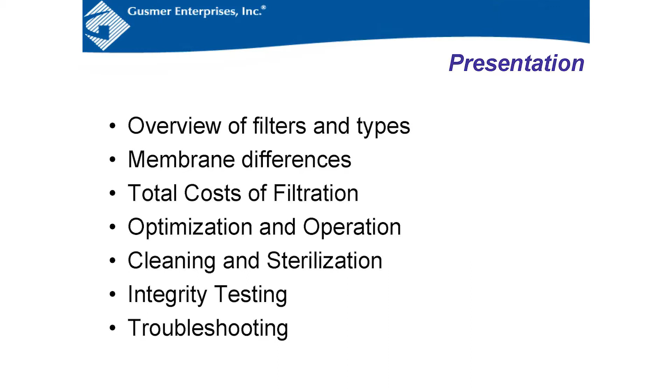After that, we look at optimization and operation, cleaning and sterilization. That's another big topic we get a lot of questions on. Folks are often asking us what's the best way to clean, what's the best way to store, and if you look at cleaning as an optimization point, there's a lot of work that can be done there with most facilities to really get the best throughput out of your filters.

I'll very briefly touch on integrity testing because again that's going to be gone into separately, and then just some final troubleshooting things.

Specifically with regards to your final bottling filtration, it's really the last step in your process that's guaranteeing your final quality of your product. It's pretty unique in that it's one step that can guarantee your quality, it guarantees your specs, and it also is pretty unique in that it's a step that has a guaranteed test that tells you if it's working or not.

There's two aspects to your cartridge filtration. There's integrity and then there's throughput. We always like to tell folks that call up with a filter issue that plugging isn't a failure. Integrity is a failure. If a filter fails integrity, then you have to worry about micro issues, and hopefully that never happens. But you do have that check.

It's rare in any industry, especially the wine industry, to have a validated QA check on a specific process step that tells you 100% if the filter's working or if it's not working, if it's integral, and if it's doing its job. So it's an important step, and thankfully it's a step that has those checks built into it.

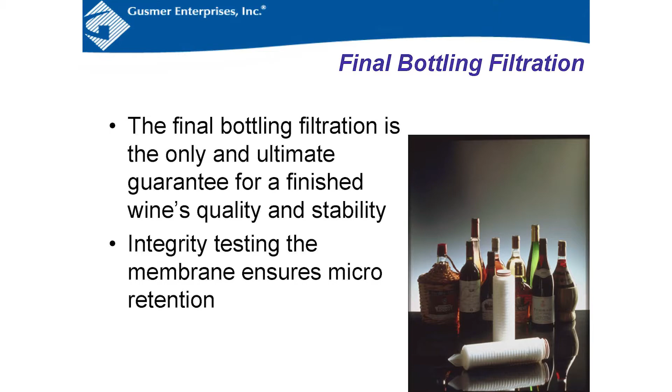So there's really two different types of cartridge filters. We've got one here, this is a pre-filter cartridge. It's a pleated pre-filter, looks a little bit more like the one on the left. We also have some other filters kicking around the room that are other clarification and wrap type pre-filters.

The one on the left, that picture of a microscope image, is a Polygard CR filter. It's a wrapped polypropylene filter, basically 500 layers of compressed polypropylene strands woven around a core. The depth is about 1 inch, so that's what we talk about when we talk about a clarification filter or a depth type filter. It has a much thicker medium, and that's used for pre-filtration, DE trap filtration, water filtration, things like that.

It really performs largely the same as other clarification products, like your sheets or your lenticulars. They may look a little bit different, but the method in which they work is pretty much the same. The other type of cartridge is unique to cartridge filters, and it's your membrane filter.

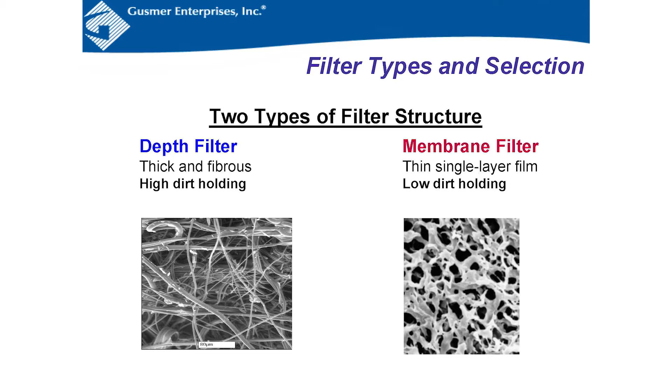A picture of that is on the right. A lot of times folks, if they haven't seen a close-up picture of a membrane, are a bit surprised. They think of a membrane as a sheet with just holes drilled into it, exactly 0.45 micron or exactly 0.65 micron, and all the removal is done at the surface. That's actually not the case with the membrane filter.

Membrane filter has a matrix that's more like a sponge. So much of the removal of a membrane filter is actually not done at the surface, it's done in the depth. So even though it does have that depth, it's absolute rated, because it's been validated not just in the wine industry, but in many other industries to give you that guaranteed removal at its pore size.

That's really the biggest difference between pre-clarification depth type filters and your membrane filter. We call membrane filters absolute because they're guaranteed to get the removal at their pore size, and also because they are integrity testable, so you can double check to make sure they're doing their job.

Whereas a depth filter, you can have unloading. So if you hit a depth filter with water hammer, pressure shock, if you run it way past its maximum differential pressure, you can get particles to migrate downstream. That will not happen with a membrane filter. If the membrane filter is integral, no particles larger than its pore size will pass downstream.

The other big thing to note with depth filters is, you guys have probably heard the term nominal versus absolute here in industry. Depth filters, we'd never call them absolute. Here at Gusmer or Millipore, we don't call them absolute. Not only are they not integrity testable, but there's a range to their typical removal.

So if you were to take 10 or 15 different clarification cartridges on the market from different vendors and line them all up, even if they were all a 1 micron filter, some may have a 50% removal at 1 micron, some may have a 75% removal, some may have a 95% removal. There's no definition or rules around what you can call a filter. As long as it removes 1 particle at its pore size, you can call it that.

At Millipore and Gusmer, we require our filters to have a minimum of 96% removal at its pore size. So if you were to get a Polygard CR clarification filter from Millipore, it's going to remove at least 96% of particles at its pore size. Many of them, like the BeviGuard pre-filter, will have 99.9% removal. So that is something you have to be aware of.

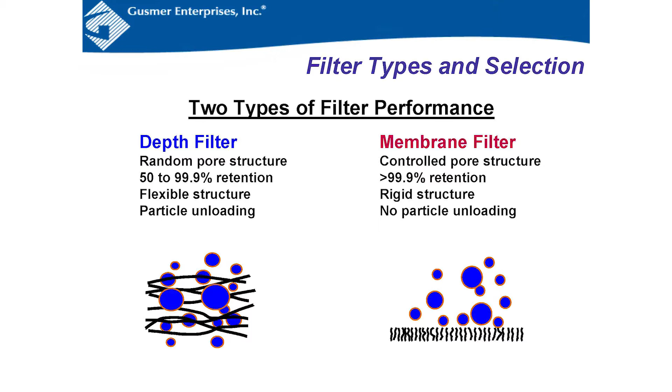We often get calls from customers. They are using another 1.0 micron filter, maybe from another industry. Water filters are notoriously low on retention if you just go to a water treatment company that also sells cartridges. And they'll swap it out with our 1 micron, and they'll think there's a problem because now the filter is plugging up much quicker. And that's because the filter's actually removing 100% of particles at 1 micron.

So you can't always look at clarification and pre-filters as an apples-to-apples comparison without also looking at the retention. You'll often want to ask the manufacturer, what is the retention of this pre-filter?

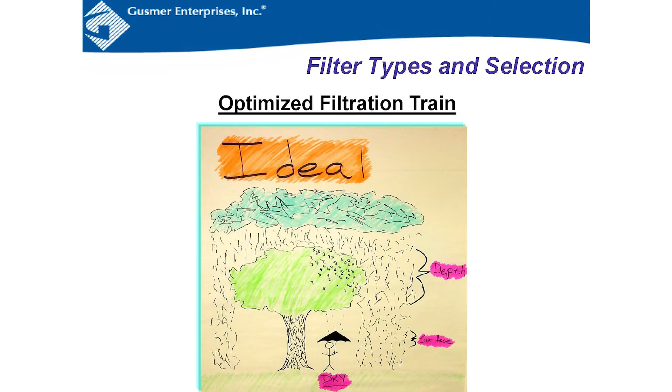The other big difference, of course, between depth filters, pre-filters, and your membrane filters is holding capacity. So in this picture, your pre-filters are like the tree and your membranes are like the umbrella. Ideally, you want the bulk of your filtration to be done by your lower grade, less expensive pre and depth clarification filters. As I said, your typical wrapped clarification cartridge is going to be about 1 inch thick.

Your typical membrane is only 400 microns thick. It's about the thickness of a sheet of paper. So while that doesn't seem like a lot, if you can imagine a microbe at half a micron or 0.6 micron, it's actually got to travel through 800 times its depth to get through that matrix. And that's how you do get that removal - not just at the surface, but also through the depth.

This is important when it comes to minimizing your costs of filtration. Ideally, we tell customers you should be using 2 pre-filters for every 1 final filter. A final filter is going to cost $300 to $400. A pre-filter is going to cost $150 to $200.

A clarification cartridge is going to cost $50 to $80. So you want to push the bulk of that filtration as far upstream as possible, using the cheaper filters for the bulk of the removal—that's what they're suited for. They have higher holding capacity, so you want to use that capacity and use the less expensive filter.

Ideally, the membrane is really just there to catch the final microbes—you don't want it doing any real heavy particulate filtration. Membrane has low holding capacity, absolute removal, it's integrity tested, and it's more expensive, so you don't want it doing the bulk of your process. You want to be using at least 2 pre-filters to every 1 final filter.

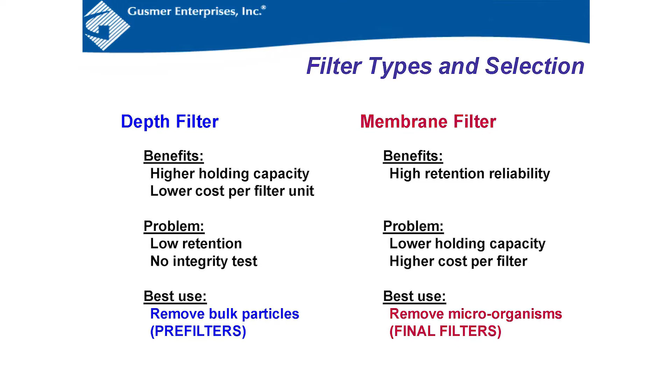If you do have a situation where you're loading up a lot of pre-filters, a plugged pre-filter will shut down your bottling line just the same as a plugged final filter. So if you're plugging pre-filters too often, you may want to add a 3rd step, either a clarification cartridge or a lenticular, something like that. It's important to manage that entire process and use the right filter for the job.

Now, unlike pre-filters and clarification filters, membranes have very defined pore sizes. Ideally, a membrane—in every case, if you're using a quality cartridge—is going to remove 100% of particles above its pore size.

There are now in industry some membranes that are non-retentive. If you see that, you have to be careful—it may not be retentive at its pore size. We don't sell anything like that, and most major filter vendors wouldn't either. So if you get a 0.45 micron filter, it's absolute—it's guaranteed to remove everything 0.45 micron and higher.

So these are your common membrane cutoffs. Unlike a clarification filter, where you can get them in pretty much any pore size—and those pore sizes are flexible because of their nominalness—membranes are really only available in certain pore sizes to industry. Other industries use 0.1, 0.2 micron, which we really don't get into with wineries.

There are a few wineries that filter down to a 0.2 micron. Most of the market here in the US, Latin America, Australia, South Africa goes down to 0.45 micron. That's 95% of the membranes we sell at Gusmer, and then we sell a handful of 0.65 and 1.0 microns, typically to French winemakers. French winemakers like using a lot of 0.65 and 1.0 micron filters because that's what most people in France do. Most Italians, Spanish, Australians, Latin Americans filter just the same as the US—down to 0.45. Most wineries don't membrane filter in France, and those that do typically only go down to a 1.0 or a 0.65.

So in our industry, 0.45 micron is considered sterilizing grade. If you read general filtration papers, a textbook, or talk to anybody from another industry—pharmaceutical, bottled water, sports drinks, Gatorade—they all filter down to 0.2 micron. So if you call a general purpose filter company and say you want a sterilizing grade filter, they're going to ship you a 0.2. It's pretty unique in wine and beer that we call a sterilizing grade filter 0.45, because a 0.45 for our industry removes all microbes of concern.

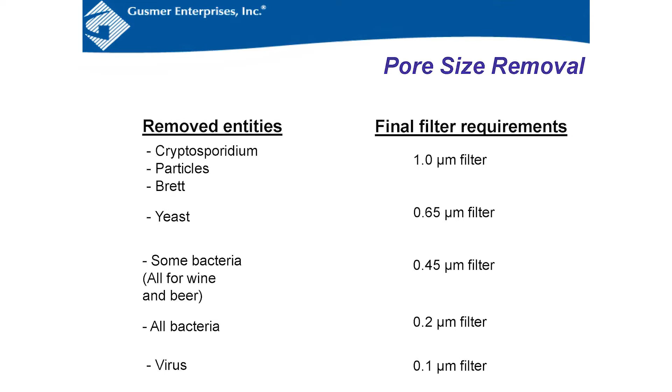For me personally, I've always used a 0.45 micron—that's what I recommend. I've seen a lot of studies over the years, and I've never seen a winemaker reliably tell the difference between a wine filtered at 0.65 versus 0.45. Maybe somebody here can, but I've never seen a study with statistical relevance showing that. So if you can't tell the difference, why introduce that additional risk of bacteria contamination? I would use a 0.45 if it's me. We sell very, very few of the tens of thousands of filters we sell at 0.65 or 1.0 micron, but that is an option out there if that's something you wanted to look at.

So here's a couple of shots of Millipore's manufacturing. One of the unique things about Millipore is that they're primarily a biotech company. They're the largest filter supplier to pharmaceutical companies, and then they found that their filters, their PVDF membrane, also works really well for wine and beer. So they don't really sell to other food industries. It's basically wine, beer, and then a smaller amount to bottled water.

But the cool thing is that their filters for the beverage market are made to the same criteria, the same lines, the same specifications as their pharmaceutical filters. And this is in Jaffrey, New Hampshire, so I know there's a few Millipore customers in here. Prior to this year, pre-filters were made in Jaffrey, New Hampshire, and final filters were made in France. As of this year, all Millipore filters for wine are made in New Hampshire, so they're sourced right here on these lines. You can see it's a pharmaceutical grade clean room, a lot of robotic technology. It's a pretty impressive manufacturing site.

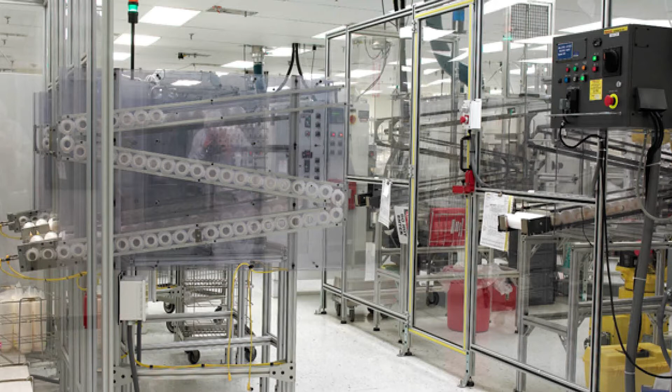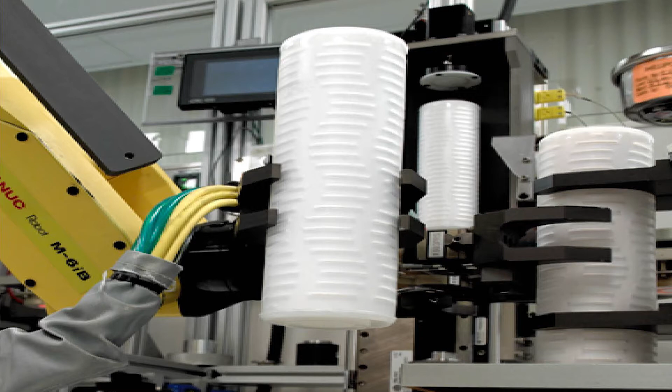As a filter person, we won't go too much into the manufacturing and how they're built because it really has no practical implication, but one of the things as a filter person I don't like is when people say a stick is a stick, or a membrane's a membrane. There is actually a lot that goes into manufacturing membranes. There's a lot of differences between the different membranes, and there are quite a few things that can impact its performance and the process that happen in manufacturing.

One small one that comes up quite often is that picture there, where the pleat pack and the end cap meet together. You have a flexible pleat pack, that's your actual membrane, and then it's bonded into this hard plastic at the end cap. If you were to survey all filter failures in the wine industry, so when you actually fail integrity due to a real in-process situation, 80% of them come down to that bond. So Millipore recently adapted a new end cap that they patented that allows for double the potting of that pleat pack into the end cap, and we don't really see those failures anymore with Millipore filters.

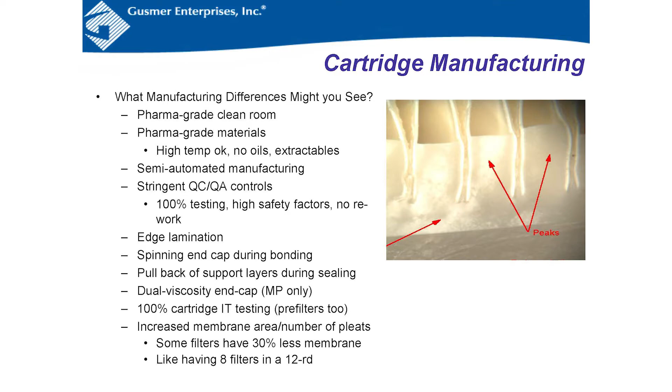So there are differences in manufacturing. The other big one is membrane area. A lot of times folks will get a data sheet, and I'm guilty of this too - I get a data sheet, half the time I throw it away. It's marketing fluff, you don't want to read that. But on the back page, skip the first 3 pages, on the back page you have your specifications. Some of those numbers can be really telling when it comes to a filter, in particular membrane area.

If you're loading 30 sheets versus 40 sheets into a press filter, or a plate and frame filter, there's a difference in surface area there. But if you're just putting the same looking cartridges into housing, you may not realize that there's 20 or 30% less membrane in that filter, and that's having a big impact on your total throughput and your process costs. So definitely look at the filter, look at the manufacturing, look at its stress tolerance, its pressure ratings, its membrane area. They are different.

The other big difference outside of the cartridges themselves is the membranes. So 10 years ago, this was a lot harder slide to present. There were tons of different membrane options on the market - cellulose acetate, nylon, polypropylene, PVDF. There were all these different membrane formats out there. Now the industry's really boiled down into 2 membranes. We continue to sell PVDF membrane.

It's what Millipore has always sold with. It's basically the filter that built the company. We find it works best for the wine industry. Even though they do have PES filters they sell to other markets, everybody else has pretty much gone with a PES membrane. The 2 main differences between the membranes is that PVDF is symmetric and PES is asymmetric. Also, the membranes have different surface treatments. So a membrane is basically just a big piece of plastic.

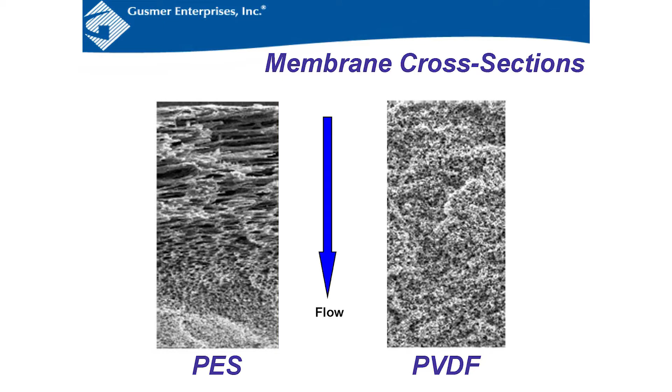This can have a couple implications, mainly in integrity testing. Since your integrity test specifications, as you'll see in the next presentation, are built around your final pore size, this has a much smaller area of that pore size. So the bubble point's lower and the diffusion's a lot higher. So the two filters do integrity test slightly differently. Fundamentally, the procedure's the same, but you do have to be aware that the specifications are a little bit different.

The other issue is with flavorings. We just did this seminar up in Napa and Sonoma. Nobody up there uses any kind of flavorings, but if you were doing any kind of blackberry merlots, wine coolers, a lot of products we see out on the East Coast, then flavorings can be very difficult to rinse away with asymmetric membranes. That's something you have to be cognizant of if you are doing flavored products. It's much trickier to rinse them out of an asymmetric membrane because of the way they coat and get in there and then change the surface tension.

So would concentrate work the same way? Is it a wine concentrate? A wine concentrate really shouldn't change the surface tension, it's more the flavorings that have different oils and things in them. What if it were a concentration of something like that, a lower concentration? No, typically I wouldn't expect more artificial stuff. A pure fruit concentrate, which we deal with a lot now in the brewing industry, typically you wouldn't see an issue with cleaning. It would clean largely the same. It's tougher, concentrates are usually tougher to filter just because of viscosity and the concentration of materials in there, but with regards to cleaning, no, it shouldn't have an impact on your integrity test.

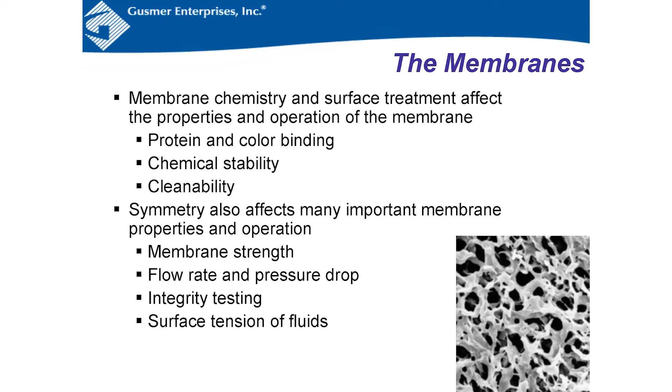Sometimes I put this slide up here, and it's not meant to scare folks into thinking that any membrane's removing a lot of stuff. Really, no membrane is going to remove any noticeable protein or color from your wine product. I've seen 96 round 40-inch housings, these massive housings, and they're not going to change your product at all either. So it's not so much that you're removing things from your wine with higher protein binding, it's that those proteins are then bound to the membrane, which causes a quicker loss of filter capacity, fewer cleaning cycles, and then lower throughputs. So this really has more to do with cleanability than anything that would change your product.

The other issue is with strength and robustness of the membrane. As you can imagine, with more void volume there's just less plastic there. So when you get to more open pore sizes like 0.65 or 1.0 micron, PES filters typically have a much lower pressure tolerance, and it's hard to find one made out of a 1.0 micron. So if you wanted to use a 1.0 micron, you'd probably have to use a PVDF filter just because of that greater stress tolerance at the more open pore sizes as you start to open up those pores.

So really that's why we recommend PVDF, because all of those things generally lead to higher throughputs, lower numbers of issues, and then gets you a lower total cost of filtration.

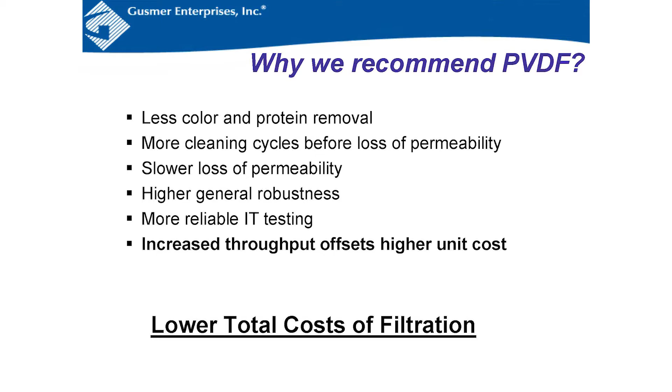You've heard me say throughput several times now. That's really the key metric. I hope everybody knows their throughput - how many gallons per change out, how many gallons per filter you're getting. You really can't look at your filter process, select a filter, or know what you're paying for the filter without looking at that number. If you have two filters, one's $400 and gets 100,000 gallons through it, one's $200 and only gets 20,000 gallons through it, that $200 filter is actually costing you $1,000. You can't look at filter costs without knowing how many gallons are getting through it. The two have to go hand in hand.

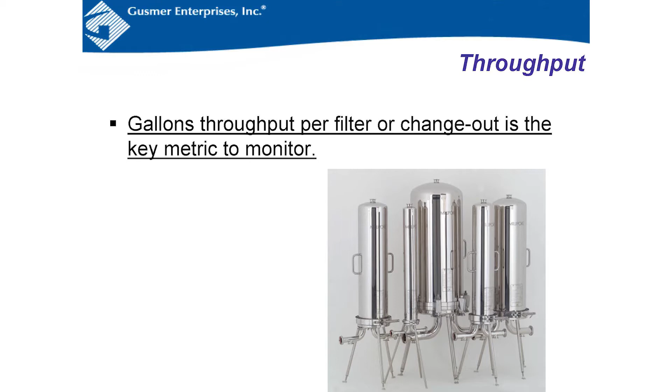Once you know your throughput, you work on optimizing it - cleaning procedures, flow rates, all the other things you can do to get more throughput out of your filter. We've helped some customers increase their throughput by a factor of 10x over a few years. So particularly in this area where folks are spending quite a bit of money on filters, if you're spending $50,000 a year on filters and now you can get 10 times the flow rate out of it, that has a huge impact to your budget. There's a lot more potential, particularly in this area, to optimize your filtration.

So when we talk about the total cost of filtration, there's really three different aspects we're looking at. Again, you have your throughput - you want to get as much throughput through your filters as possible, and that directly relates to your filter cost, and then you have your total cost of filtration.

I know in this area, one of the big rules of thumb for bottling line downtime is $6 a minute. Every minute your bottling line is down, you have a crew standing there, soap going on the conveyor, compressors running, pumps running. It's generally an industry accepted value of about $6 a minute cost. So if you have filters on multiple lines plugging up a couple times extra each week, and it takes 2 hours to turn around a filter, there's a huge cost, not just to your bottling attainments, but to having your folks and all your equipment running.

Also, every time you plug up an 8-round or a 12-round housing, that's quite a bit of wine loss. Look at cleaning - every time you have to clean the filters, 30, 40 gallons a minute, times 2 hours of water going down the drain. In this area, water's not as big of an issue. You go up to Napa, water's huge. If they're sending an extra few thousand gallons of water down the drain, that can be a big impact. It's important everywhere in California, but certain areas are particularly hit hard by water restrictions on wineries.

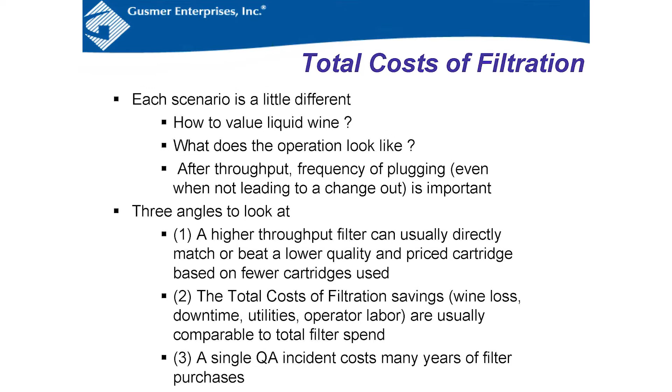And then obviously a single QA incident - you should never see a legitimate integrity failure on a filter. One of the things that bothers us is when we run into a customer that's kind of lackadaisical about integrity failures, like 'yeah, I fail integrity every few months, or yeah, we have an issue.' You should never see that with our filters, and you should never see that with any filter. If you're failing integrity, that's a major issue - that means your product is at risk on that batch. So if you have an integrity failure, let us know, let your supplier know, you want to troubleshoot that. I can say 90% of the integrity failures we deal with are due to shipping. UPS and FedEx by far damage the most filters, or cause the most filtration issues in industry. So always be cognizant of shipping damage and do a careful inspection on the filters.

But if you do get a real filter failure that results in a QA incident, there goes your filter cost savings for the next 50 years. There's nothing more expensive than a single QA incident. So if you do have a filter that's giving you repeat issues, you may want to look at changing it, or work with the vendor to fix that, because that's a cost that really shouldn't happen.

So people hate spending money on filters. Winemakers have no problem writing a $100,000 check for bacteria, yeast, barrels, oak, shiny new tasting rooms. Nothing gets a visceral reaction from people more than buying a filter. Nobody wants to spend money on a filter for whatever reason.

But when you really break it down, if you're getting 100,000 gallons through a 30-inch filter, the cost of filtration is $0.004 per gallon, which is 0.08 of a cent per bottle, or $0.0008 per bottle. That's lower than your cost of SO2. That's lower than your cost of the label. That's the lowest process cost in industry.

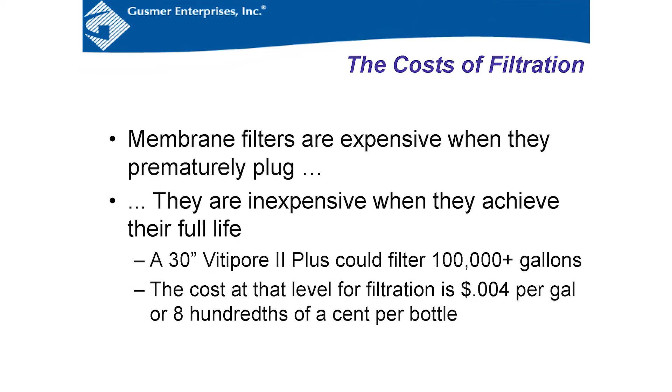One thing that a lot of facilities do, which really doesn't make sense for the wine industry, but it's what the industry does, is everybody wants the same size final filter and pre-filter. If you're running a good process and your pre-filter is plugging twice as often as your final filter, that doesn't really make sense. You should have more filtration capacity there. It doesn't matter if a pre-filter plugs or a final filter plugs—either way, your line's down and you have to clean or change out the filters. So if your pre-filter's plugging twice as often, you should use a bigger pre-filter housing.

A few folks are starting to go down that route, but most people still size the final filter and then want the same size housing on both. There are benefits to that—you've got the same size gaskets, the same spare parts—but really, pre-filters should be sized bigger than the final filter. That's what most industries do, but not so much in the wine industry.

Water filtration is usually sized a bit higher just because there are higher flow rates with water. And if you're doing any kind of specialty cartridge processes—DE trap filters catching fines, or clarification for tartrates, special processes like that—come to us and let us know, and we'll size that out for you, because those are a little less cookie-cutter.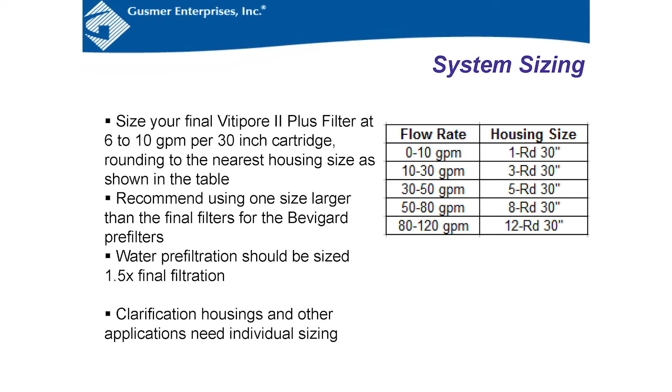One important thing with system sizing: most often when customers come to us looking for the recommended size for their line, because these are tied to the filler, they give us the average bottles per minute of a filler. They'll say, I'm running 100 bottles a minute, I'm running 200 bottles a minute. That's your average filler output—that's not your maximum flow rate through the filters. So if you're sizing based on average filler output, you have to add 30% to account for your maximum flow rate, then size your filters based on that number.

One thing that I'm a huge fan of, particularly in this area, I think there's a lot of customers saving a lot of money and really helping their operation out, is dual filtration skids. This is something that's really starting to finally catch on, and I think anybody running an appreciable, larger size bottling operation that doesn't have dual filtration skids is probably leaving a lot of money on the table.

What this entails is you have identical pre and final filters, so the same process you're running, but you have two sets of the same filters side by side. You've got one inlet, one outlet, but the filters are capable of being cleaned independently. So as you're running on one filter set and it starts to plug, you can get your second filter set cleaned and sterilized and then switch over to it, so that way you never shut down bottling.

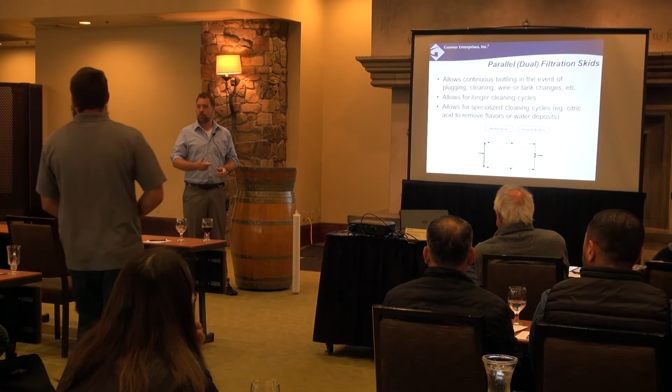You can also bring down your filters at their optimal cleaning point. A membrane filter is typically fully plugged at 40 psi differential. Differential pressure is your inlet minus your outlet. Most people are going to start to lose flow at around 32 psi. The optimal cleaning point is 28 psid. You don't want to run your filters until they're 100% plugged and then take them down to clean - you're not going to get as good of a cleaning out of it. Ideally, you want to take those filters down a little bit early.

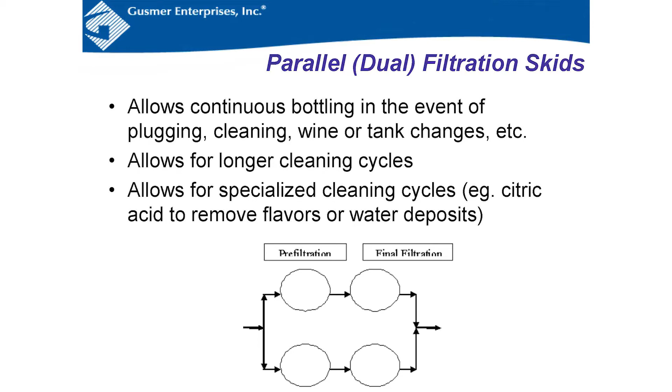This allows you to do that a little more flexibly. It also allows you to get every last drop out of your filters, every bit of capacity, because you're not shutting down the bottling run.

Right now, if you're running just a pre and a final filter, and those filters have just plugged, and you still have a large batch to go through, or another day's run, the tendency is going to be to throw away those filters rather than clean them. With this process, as long as you can clean that second set before the other ones plug up, you can keep running.

A lot of large wineries now with this system have a spec to throw away filters if they plug within 2 hours. If it's still got an 8-hour run on it, that may not be acceptable for some facilities, but if you have dual filtration skids, you can just keep bouncing back and forth between them, never shutting down bottling, getting more cleaning cycles in, and using every last bit of capacity on those filters. I've seen facilities go to this and in some cases increase their throughput through their filters by 40, 60, or even more percent. This can have a huge impact.

If you think about the costs, a lot of times folks think housing - a big chunk of stainless - is expensive. The average cost of a 3-round housing is $2,500 bucks. So if you're running 3-round housings, two housings is $5,000, plus some piping and valves, $6,000. If you can extend the life of your filters by 50% or more, never shut down bottling, and have that greater flexibility, you always have a backup set.

One of the worst things when you're running a filtration is at the end of the run, the VA film on top and the solids that have settled to the bottom start to come together, and then you plug up your filters with 50 gallons left, or 100 gallons left in the tank. What do you do with that wine? Do you do a 2-hour cleaning to try to get that last little bit of wine out? Do you just send it to reclaim? Do you send it to top off another tank that's now going to kill that tank's filterability? With this system, you don't run into those situations where you've got to come down and extend out the shift. So it gives you a lot more flexibility as well.

Once you've got your filters up and running, they're actually pretty simple. You want to track your throughput, you want to track your differential pressure. Your differential pressure is your inlet minus your outlet. That tells you how plugged your filter is. It's a direct ratio. Your filter's fully plugged at 40. That means if your PSID is 20, the filter's half plugged. Half the capacity for that run is used up.

The other thing you want to watch out for when you're operating is the formation of air and gas bubbles. So you always want to vent your housings. This is something, particularly in this area, we do see a lot of, and we're starting to see more and more of it as customers are starting to spritz a lot of their wines. So adding 30 ppm, 60 ppm of CO2 to like a white wine, that's adding a gas that can then come out of solution, particularly if you're processing outside or it's hotter out.

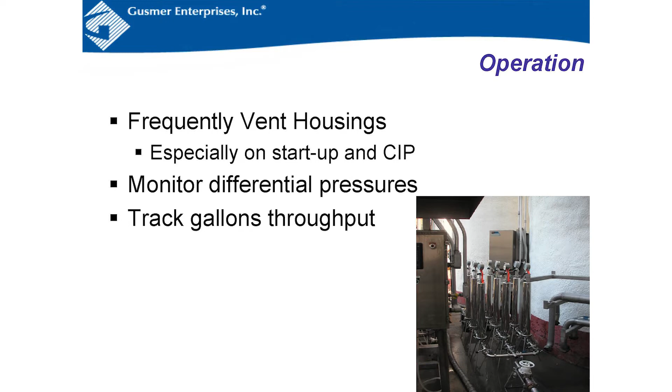Usually, you can see the housing over there, it's a tall dome. That's usually the high point in your process. So any CO2, N2, oxygen that comes out of solution, it's usually going to settle in the top of that dome, and then that starts to create an air bubble. The membranes, if they're wetted and you have an air bubble up there, as it starts to overlap, it won't allow flow through the filter.

So we've gotten filters back from customers where the top part of the filter is pure white, looks like it just came out of the bag, and then you start to see this gradient and the bottom is red, like it's processed wine. And we know instantly that there's an issue in that facility with air bubbles, or they're running a carbonated product and it's overlapping, and you're essentially not using part of your filter in that instance.

So if you don't have a sight glass, that housing has a sight glass on it. If you don't have one, I recommend getting one. And then the other option is, if you're walking through your facility, look for the condensate line. You're processing cold product, there's going to be a condensate line that forms on that housing wherever the fill level is. So that's sometimes a quick way to go through, but you'll want to always make sure your filters are vented.

Not just during operation either. You want to make sure they're vented during CIP. Usually there's a higher DO and there's more entrained air in your CIP process, especially when you're switching back between cold and hot water. If you get an air bubble that forms during CIP, you won't get the contact in the top of that dome. I've seen a lot of housings where you flip the dome, you look in there, everything's nice, shiny stainless up until the end of the dome, and then you have a biofilm, you have growth in there. And it's on the upstream side of the filters, so the filter should still filter everything out, but it's certainly not good to have growth inside your dome. So it's important to also vent during CIP processes as well.

One of the trickiest things is when we get a call and somebody says my filter failed. And then we ask, well, what happened? And they tell us it plugged. Plugging is not a failure. Plugging is the filter doing its job. If a filter plugged, that means it did its job, and now we have to look at why it plugged.

Did something change with the wine? Does it have a poor filterability? Is a screen broken on a pressure leaf? What happened that caused that plugging, if that plugging was out of normal for the facility? If normally they get 100,000 gallons through the filter and now they've only gotten 30,000 gallons through the filter. Is there a new additive? Was there a process change?

What's going on? But the plugging in itself is not a failure. A failure is integrity. Your end of life should be plugging based, so every filter eventually should plug. And particles will plug differently. So if you have an issue with DE, for instance, that has very little impact on your filter capacity. DE really doesn't plug your filters all that much because it's a hard particle. It leaves flow channels, it builds up on the surface of the membrane. It really doesn't do much, and it's very easy to clean off.

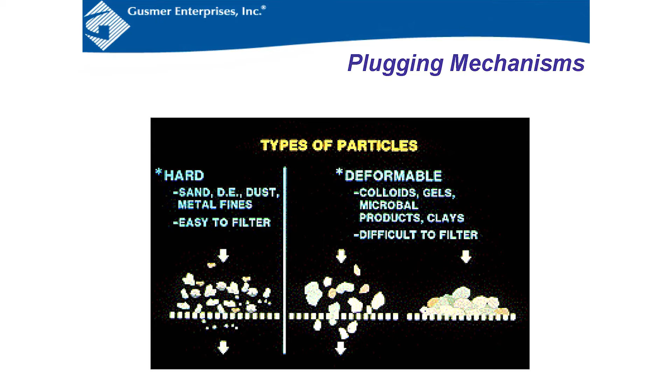The hardest thing with regards to plugging are your deformable materials, colloids. Usually microbes aren't present in too high a concentration to cause an issue. Bentonite, there's nothing worse for filters, not just cartridges, but every filter, than bentonite. When I worked at Millipore, even on pharmaceutical projects, if we wanted to plug a filter for a study, we'd get wine-grade bentonite. Companies that make filters for other industries still buy wine-grade bentonite in order to plug their filters. Nothing will plug filters better than bentonite. So you never want to not have a well-racked wine or do anything where bentonite can get into your filters.

Those materials are really what causes a loss of your filter capacity during a run. And that's because of the way they blind off on the surface of the membrane. I think we touched on most of this, but one thing in here that I think surprises a lot of customers is the impact that flow rate can have.

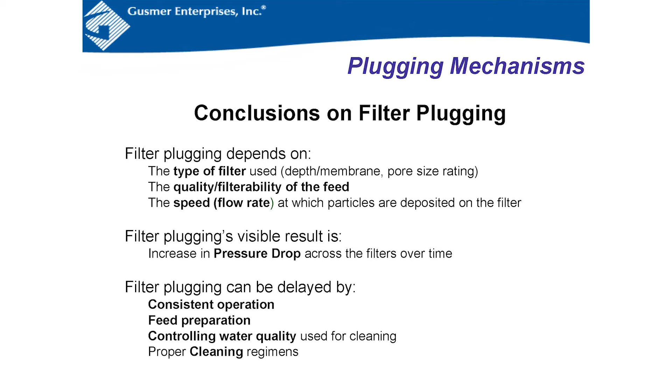If I were to take two identical tanks of wine through two identical filters, 100% same process, except for flow rate. So 1,000 gallons of wine filtered at 20 gallons a minute versus 1,000 gallons of wine filtered at 40 gallons a minute. At the end of the run, the one that was filtered at 20 gallons a minute is going to have a much lower differential pressure. It's going to be much less plugged. Even though the particles have stayed the same, even though the gallon size has stayed the same, running at that higher flow rate blinds off the membrane more effectively.

We call it face velocity in the wine industry. You want to have the lowest possible face velocity, and that'll help during the run extend your filters more. That's not really going to have a long-term impact of the filters. You're not going to degrade the filtration capacity over many runs much differently, but during the run, your differential pressure is going to increase much quicker the faster you run.

So we always tell customers to run at the slowest consistent flow rate as possible. And sometimes that's tricky, with filler operators that don't realize there's more than just off and high speed on their filler. You can use that filler surge tank or that filler bowl as a good surge tank. You can slow down your flow. You can tie your filler to your pump sometimes and change the speed on this. So you want to always run at the slowest consistent flow rate as possible.

And then the biggest thing that's going to have an impact in many cases on your filters is the filter cleaning. So really there's two purposes of cleaning. The first one is to eliminate any flavor or color carryover, and the second one is to extend the life of your filters. If you didn't clean your filters, they would plug up and lose their capacity much quicker than when you clean them. As your differential pressure goes up, you shut down, you clean them, your differential pressure goes down.

No filter can be 100% cleaned. They're always going to plug up. Eventually they're going to lose their capacity, they're going to plug up, and you're going to have to change the filters out, even in a perfect process. There's two main reasons for that. Two things that really cause your long-term loss of filter capacity. That's your bound proteins at high temperature. So going back to the membrane characteristics, anything that's bound on the membrane when you get to 135 degrees or higher on your cleaning is going to be permanently lodged onto the membrane, and that's going to cause a loss of capacity.

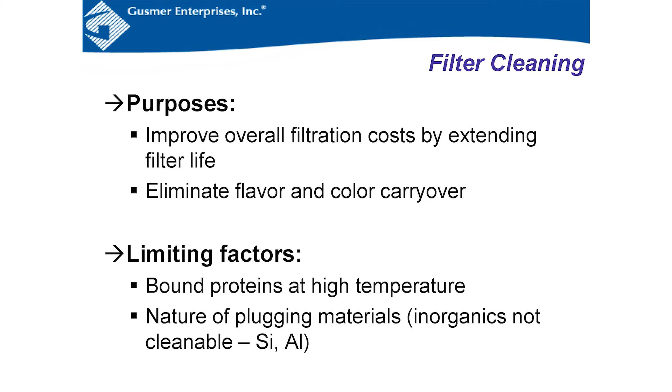The other big cause of loss of life on your filters is going to be from your water. Many people's water actually does more long-term damage than their wine does, which seems counterintuitive. A lot of folks see clear water and think it's got easy filterability, but there's a lot of dissolved materials in there that permanently build up on your membrane and don't come off. We've seen many people optimize their water and see a huge, sometimes double the filter throughput they had without any water treatment.

One comment I always like to make: don't assume that municipal water supplies are the cleanest. Some of the dirtiest, most plugging water supplies I've ever seen come from municipal sources. Some of the cleanest water I've ever seen comes from wells. Wells are variable—some are poor quality, some are higher quality—but don't always assume municipal sources are cleaner. Those are treated for health effects, not for contaminants that are dissolved and may be building up or plugging your membranes.

So that's the other big thing. One way in which we often tell if a customer may have a water issue is if you have a skewed pre-filter to final filter ratio.

I said earlier on, we recommend customers, if everything's dialed in, you should be using at least 2 pre-filters for every 1 final filter. So if I look at a customer's spend history and they're buying 1 pre-filter for every 4 or 5 final filters, there's one of 2 things going on. Either they're not using a tight enough pre-filter—they're using somebody else's 1 micron that's only 50% retentive—and then they need to tighten down the pre-filter, or they have a water issue.

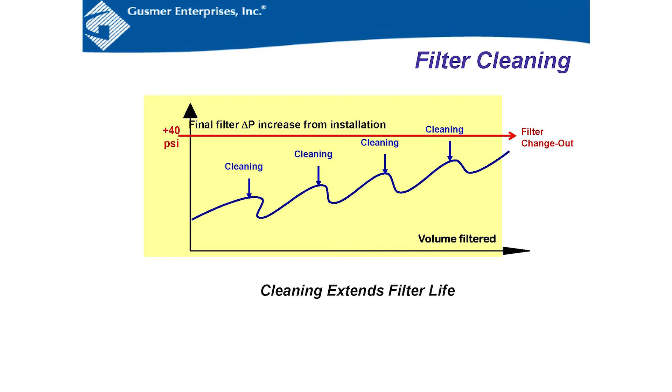We've actually seen, in a couple cases, large customers spending a lot of money on filters do away with their cold water rinse in order to save water. Instantly, their filter spend will double. That is a very terrible thing to do with regards to cleaning your filters. You always want to do a cold water rinse beforehand.

One of the best things you can do in an ideal world would be to do a cold water rinse, then a warm water rinse for a while, and then gradually step up to your hot water. Unfortunately, most systems in the wine industry don't give you the ability to hold an intermediate temperature like 120 degrees. But fortunately, most systems also take 15, 20 minutes to come up to temperature. So you run your cold water for 10 minutes, switch over to hot water, and it takes 10 or 15 minutes to get up to 180 degrees—that gives you a nice intermittent warm water rinse before you reach 180 degrees, and that's really the best. You want to do as much of that intermittent time as possible.

If anybody here has ever cleaned a filter with the outlet open, you run your cold water through the filter, you see a ton of color and stuff come out. Eventually it goes clear. You up the temperature 10 or 15 degrees, more stuff will come out. You'll see more color come out, and then it goes clear. You can keep doing that all the way up to 180 degrees, and every time you step up, you'll see more material come out. The goal is to get as much stuff out as possible before you get to your 180 degrees, and then those bound proteins are permanently lodged onto the membrane.

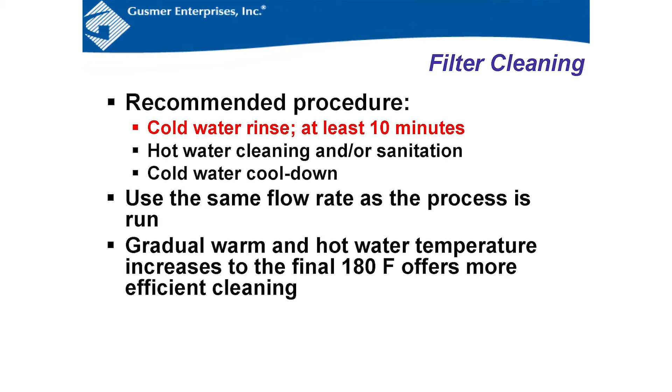If you were to run your sanitation and you weren't going to integrity test or do anything to the filter, you could walk away and let it cool down on its own. But if you're going to do things to your filter like integrity test, you want to do that cold water cool down. One thing we always recommend with cleaning, especially with larger customers, is try to use about the same flow rate as you're running your process.

If you're running your process at 50, 60 gallons a minute, you don't want to try to clean with 2 gallons a minute of flow. Volume matters, temperature matters. You really have to use about the same flow rate as your process.

And then we talk about the gradual warm and hot. So if I could design a hot water system for cleaning filters, I'm going to do ambient water, whatever the cold water is, for 10 to 15 minutes. I'm going to program 120 degrees, hold that for 10 or 15 minutes, and then have a gradual ramp up to 180. That's ideal. Most people don't have that capability to hold at 120 degrees, but if you were looking to do everything perfectly, that would be it.

One of the good things about the wine industry is that you can clean and sterilize at the same time. We get a lot of questions on whether people can use chemicals or steam to sterilize filters. You can - I personally don't recommend it, because then it's redundant. You need 180 degree water to clean a filter, and 180 degree water can also sterilize the filters. So in that case, steam and chemicals is just redundant.

It's an extra cost, and in many cases those are less safe in most winery environments. So I personally would never use steam, I don't really recommend it. Steaming is by far the easiest way to damage cartridges. There are a lot of customers that are using steam successfully, but I think ideally you just stick with hot water.

So I mentioned before already that you can see the difference here in your differential pressure spec. This is the specification before a filter is broken. At ambient temperature, it's 80 psid, and that's kind of an industry standard number. Millipore doesn't fail until 120 - they've got a big safety factor built in there. But up at 180 degrees, you can see it drops down to 25 psid. That's why when you're at hot temperatures, you do need to monitor your differential pressures - water hammer, pressure spikes, things like that become a lot more important.

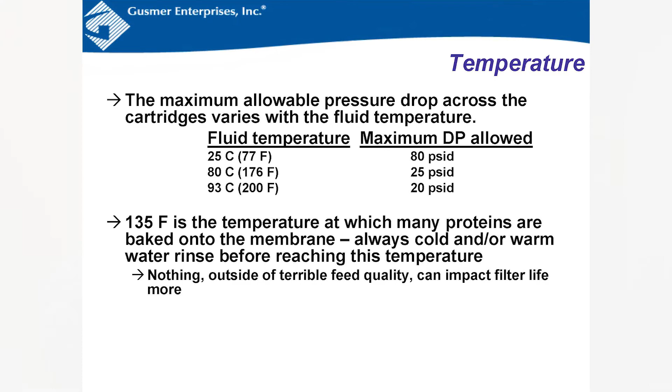And then, as I mentioned, that 135 degree temperature is important. That one customer that I saw recently who started pre-circulating their hot water saw their filter spend double on the same gallons - their filter almost looked like a glazed pot, it almost had an enamel on it. They were just baking everything that was right on the filter. So you want to get as much of that material off before 135 degrees as possible.

So water can have a huge impact on your filters. It's not just wine going through your filters, it's water. And in some cases, waters will have clays in them, they'll have mineral deposits, they'll have stuff that builds up. Most important thing for water is softening.

A lot of times folks will ask us, I know I need to soften it, I know I need to filter it, which is more important? As much as I think filtration is important to your water, softening is going to do more for you.

One thing that I've seen a lot of issues with folks out here is using your well companies or using kind of a general purpose non-water specialist company to design your softeners. They'll just go to Home Depot, grab the off-the-shelf softener, pop it in line.

Not all waters are the same. They have different elements in them. They're different resins. So a softener is essentially a tank of resin that absorbs that material that otherwise would be deposited onto your filters. Not all waters are the same.

If you have a higher magnesium content, there's different resins than if you don't have that, or if you have a calcium issue. So have your water tested, design the right softener that's going to work for you, and you'll see much better performance. I have seen customers just put in the wrong softener and they still have hard water, they still have deposits, they still have issues.

So you want to make sure you use a real water company that's going to test your water and design a good softener for you, and then you can also go to filtration.

But it's not uncommon for us to see folks who have popped a softener and a filter in, and automatically their bottling filter spend goes down by 25, 30%, sometimes more. So this can have a big impact, again, depending on the quality of your water.

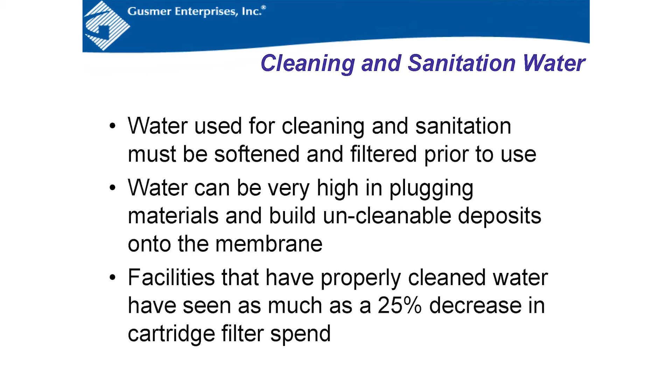I won't go too much into integrity testing just because that's the focus of the next presentation. What I will say about integrity testing is the most important time to do it is on install. 95% of your integrity issues are going to happen on install. The vast majority of integrity failures that we see are from UPS and FedEx.

Always check your boxes for damage. Open it, look in the bag before you even open the bag, make sure nothing's cracked, nothing's damaged, and then make sure you do your integrity test on new filter install.

Once the filters are installed and they're running wine, that's the easy part. It's hard to break a filter when it's just running wine. Usually your issues are going to happen on install, either rolled O-rings, damage during the install, shipping damage. That's really when almost all of our integrity issues we see happen.

So again, your end of life for your filter should be throughput based. You should maximize your throughput, and when you throw away your filters, that should be the reason. It shouldn't be an integrity issue.

Of the tens of thousands of filters we ship, more filters to the wine industry than anybody else, we only get a few, literally a handful of actual integrity issues a year that then we want to work with you on to help figure out what happened.

Was there a slug of caustic that got in there? Is there a water hammer or pressure shock? Is there a steaming issue? What caused that failure? Because the filters shouldn't fail. If they fail, there's a cause that we want to work with you on with regards to our filters. So always never take the approach that filters just fail or that's something that should happen. Always contact us if there is an issue.

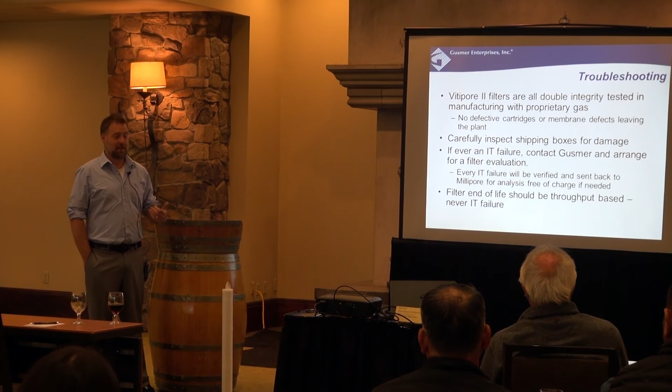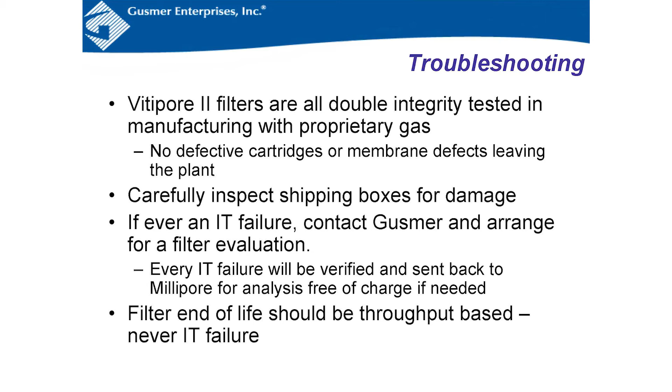One of the good things about Millipore, and one reason I can say that, is every filter that leaves their plant is integrity tested. Every foot of membrane, as it's put into the roll, is integrity tested. Then every 10-inch element on a membrane is integrity tested. And every finished device is integrity tested. So essentially, that membrane's been integrity tested three times by the time it leaves the factory. So we know there's no membrane defects, no potting issues, no issues on the seams or pleat packs. We know it's good when it leaves, so it should not fail in process.

I had to add these qualifiers recently to this presentation. I used to just say we want every 30-inch filter to get 100,000 gallons through it. Now, in a larger bottling operation with good clarification, in a multi-round filter, 3-round or higher, typically that's what we want to see. I want to see a 3-round filter get at least 250,000 gallons, preferably 300,000 gallons. I want to see a 12-round filter housing get 1,000,000 gallons. Those are kind of our benchmarks.

That being said, we've got some customers that have now optimized to the point where they're getting 3, 4 times that. We've got one that recently got 5 million gallons through a 12-round housing - massive optimization there. They're a large customer spending a lot of money on filters, so that optimization has a bigger payback. But when you get into smaller customers, running a 1-filter setup and trying to rack off instead of doing clarification, you have to be more careful with these numbers - the process is going to be a little more variable. But ideally that's your benchmark. So if you don't know your throughput, you don't know where you'd stand on that scale, and you should know your throughput so we can work on optimizing it.

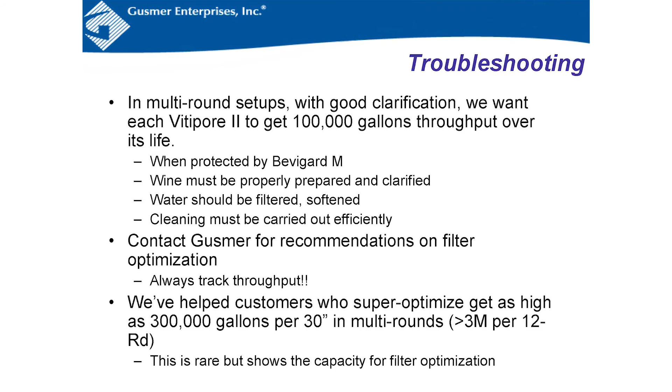So you suggested not using steam for cleaning or sterilizing - why? Steam does not clean. You still have to use 180-degree water to do a good clean. So in that instance, steam becomes redundant.

The other issue with steam is you have to steam a filter dry, so it limits the way in which you can operate. Steam really only works in a 1-shift operation, because you have to let the filter dry out before you do the steam.

You'll see in the next presentation about bubble point - since steam's a gas, the bubble point of a 0.45 micron filter is 28 pounds. The maximum pressure spec is 25 pounds. So in order to get that steam through a wet membrane, you actually have to break the filter. So you have to steam dry, which means the only way to really run steam in most operations is to do your filtration on 1 shift, clean at the end, let the filter sit overnight until it's somewhat dry, and then you can steam to sterilize on startup.

Personally, I think you just do it all with 180-degree water - you get your cleaning and your sterilization right there. It's cheaper in most cases. The only issue sometimes is folks who don't have enough water supply to sterilize the filters, and the filler usually is sterilized along with it. But yeah, to me steam's redundant. It's very easy to damage filters, and I think it limits the operation.

So what damage can steam do to the filter? It'll melt it essentially, or it'll break it, because since steam's a gas, if you have a wetted membrane exposed to any gas, it acts like a wall until you break that bubble point - it's going to resist that gas until it gets up to a high enough pressure. On a 0.45 micron filter, that bubble point is going to be about 28 pounds pressure. So that's a lot of pressure at 210, 220 degrees, whatever the steam's coming in at, and that can physically break the filter because you're at that elevated temperature.